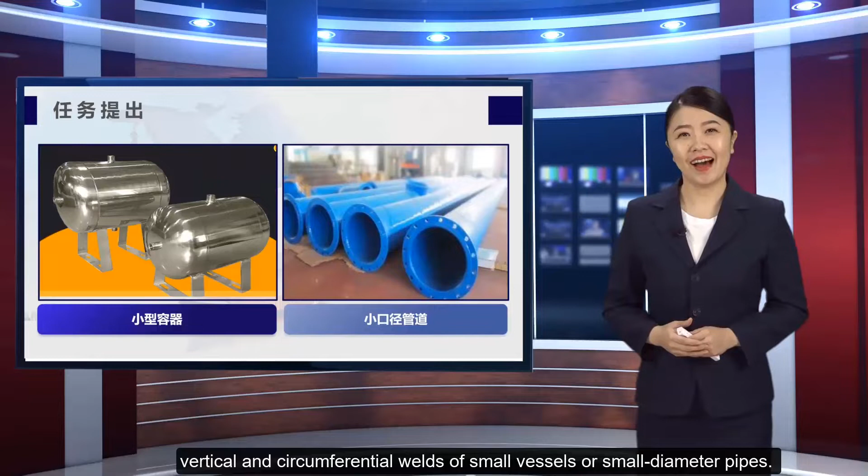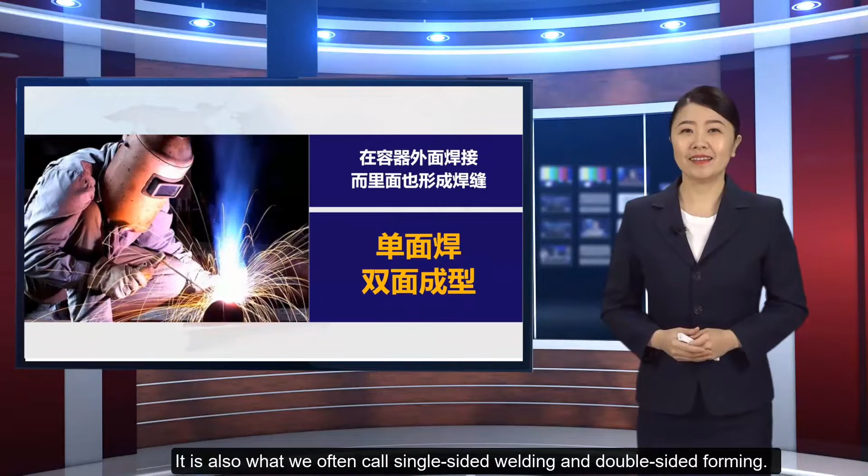In actual production, butt horizontal welding of electrode arc welding plates is mostly used for the welding of horizontal, vertical and circumferential welds of small vessels or small diameter pipes. This welding method can weld outside the vessel and form welds inside. It is also what we often call single-sided welding and double-sided forming.

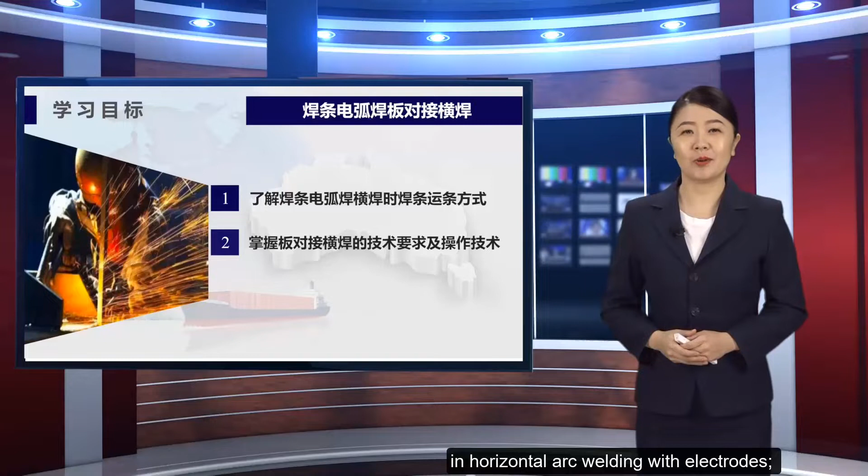In this class, we will explain the basic operation skills of butt horizontal welding of electrode arc welding plates. Learning objectives: 1. Understand the electrode transport method in horizontal arc welding with electrodes. 2. Master the technical requirements and operation techniques of butt horizontal welding of plates. 3. Select welding parameters.

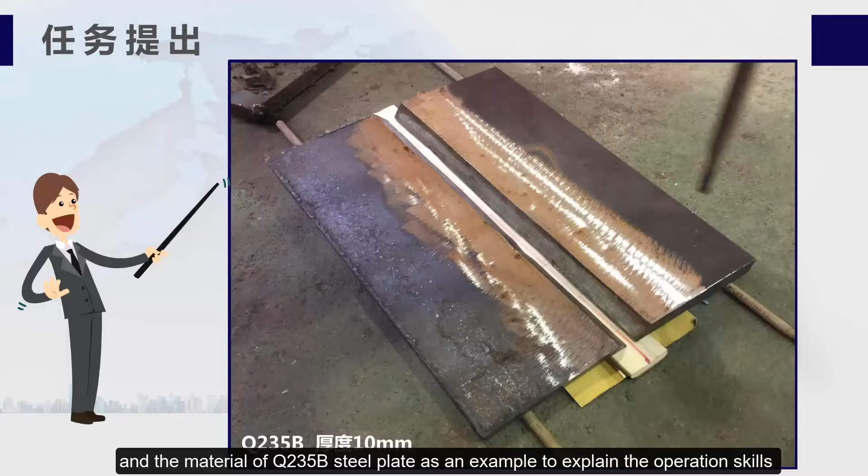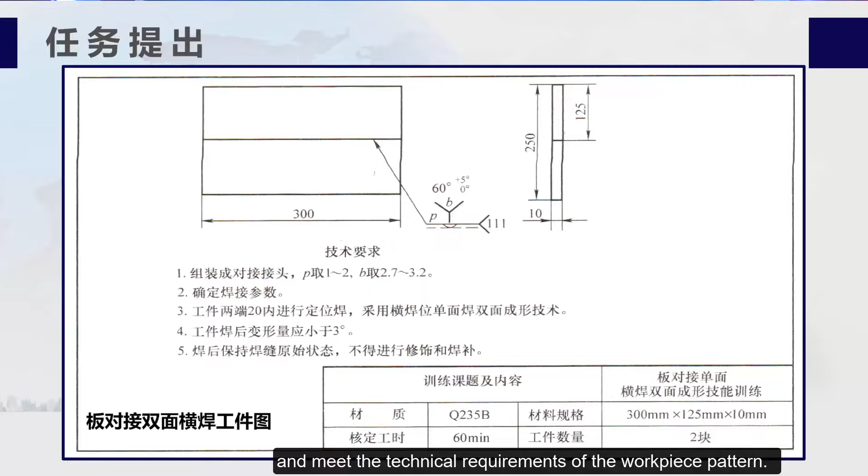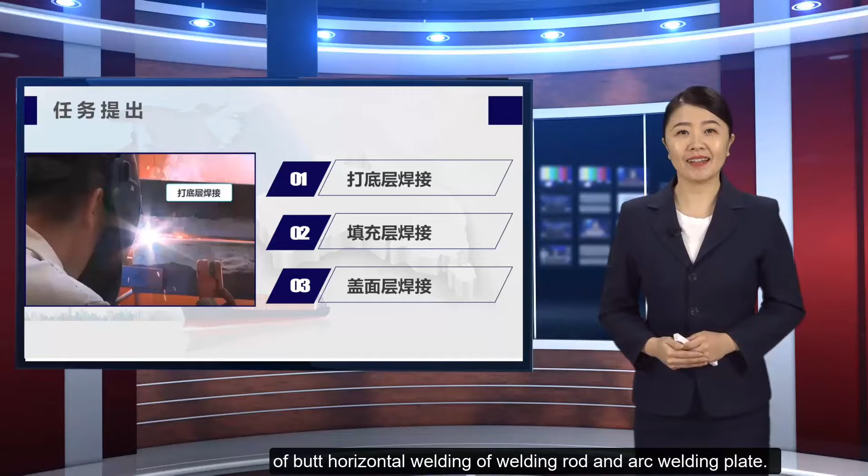Next, we take a 10 mm thick Q235B steel plate as an example to explain the operation skills of butt horizontal welding of electrode arc welding plates. The students read the workpiece pattern, complete the welding piece production task, and meet the technical requirements of the workpiece pattern. The welding operation is divided into 3 layers: the bottom layer, the filling layer and the cover layer. Let's follow my video below to understand the operation.

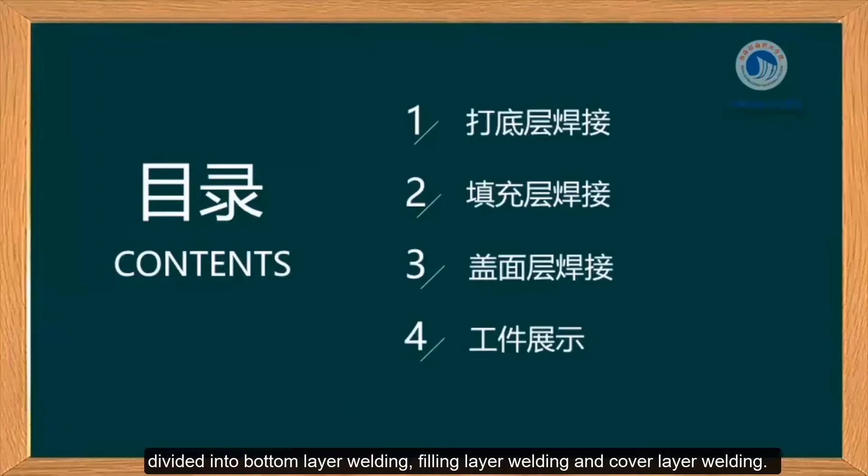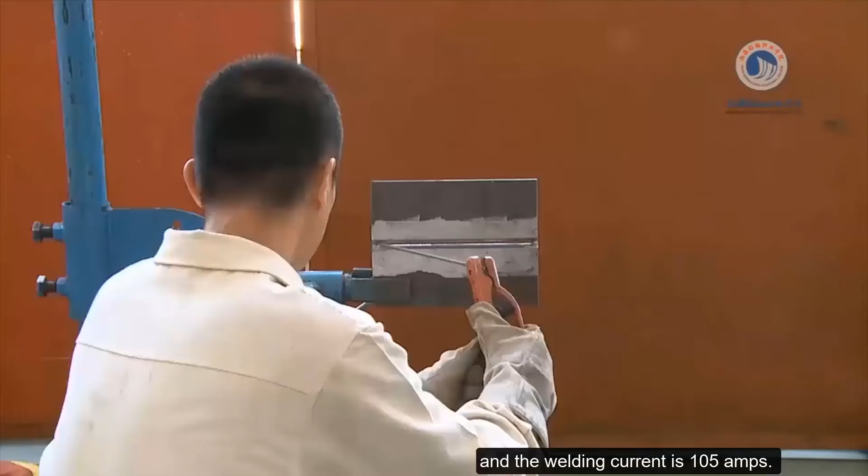Electrode arc welding plate butt horizontal welding can be divided into bottom layer welding, filling layer welding and cover layer welding. The bottom layer: the diameter of the electrode is 3.2 mm, and the welding current is 105 amps. Fix the assembled test plate vertically on the fixture according to the horizontal welding position. When the bottom layer is welded, the right welding method is used with arc breaking welding.

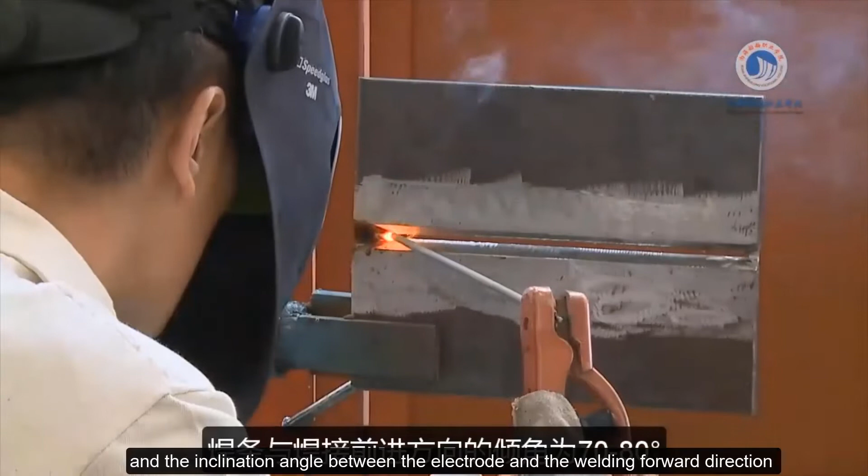During the welding process, the angle between the electrode and the weldment is 80 to 90 degrees, and the inclination angle between the electrode and the welding forward direction is 70 to 80 degrees. When welding the bottom layer, start the arc in the groove 10 to 15 mm before the starting welding end, and then pull the arc back to the tack weld for welding.

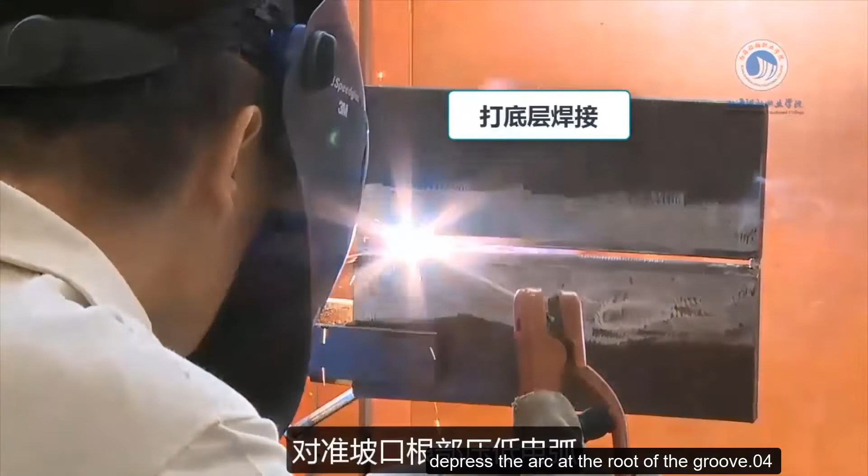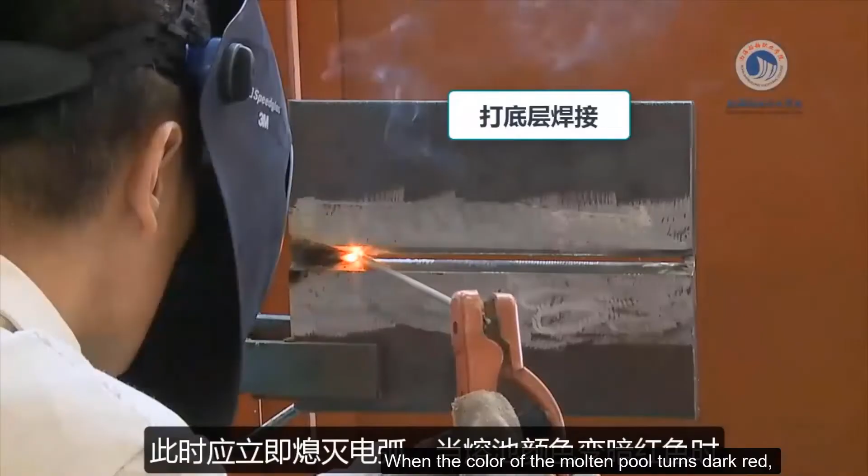When the welding arc reaches the end of the tack weld, press the arc at the root of the groove. When a pop sound is heard, it means that the weld pool has been formed, and the arc should be extinguished immediately. When the color of the molten pool turns dark red, the arc should be reignited immediately above the molten pool for welding. Repeat the above method until the bottom welding is completed.

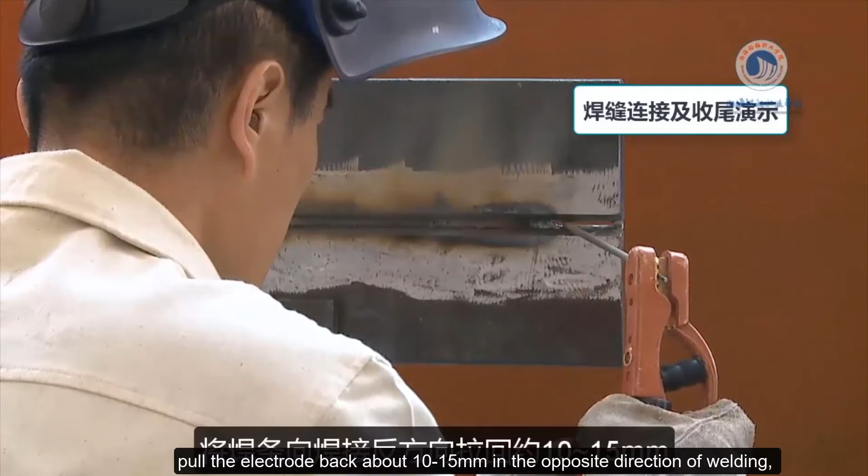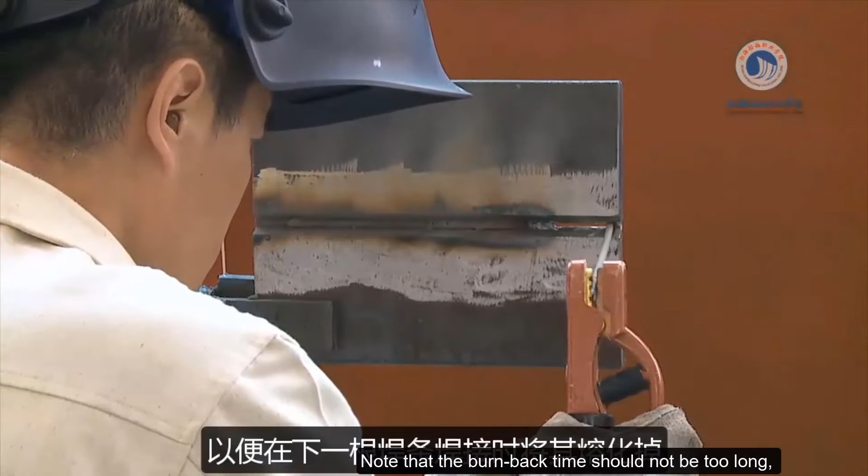When the electrode needs to be replaced, pull the electrode back about 10 to 15 mm in the opposite direction of welding, and lift the electrode quickly, so that the arc is gradually elongated and extinguished quickly. This brings the shrinkage hole to the surface of the weld so that it can be melted away when the next electrode is welded. Note that the burn-back time should not be too long, so that the joint becomes a slope. The arc for the joint should be started 15 mm in front of the crater or weld pool.

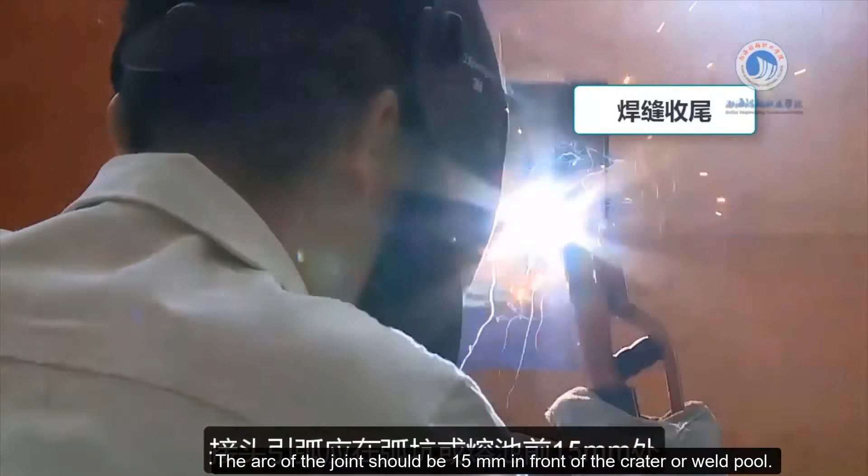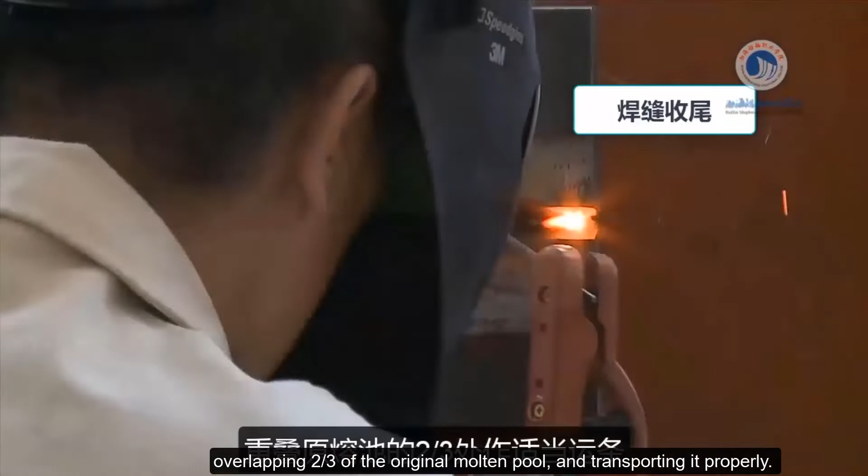After the arc is ignited, it is properly elongated, and it is quickly led to the joint arc crater along the seam, overlapping 2/3 of the original molten pool, and transported properly. When the front and rear molten pools are in good agreement and meet the requirements of the weld size, welding proceeds in the welding direction.

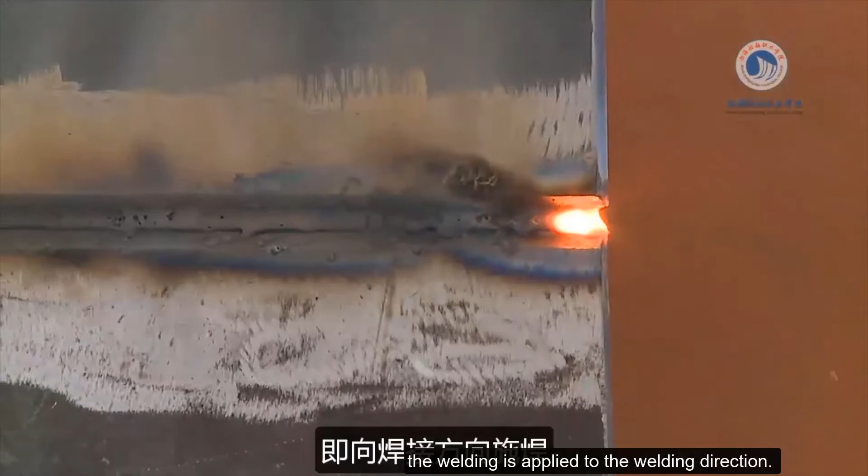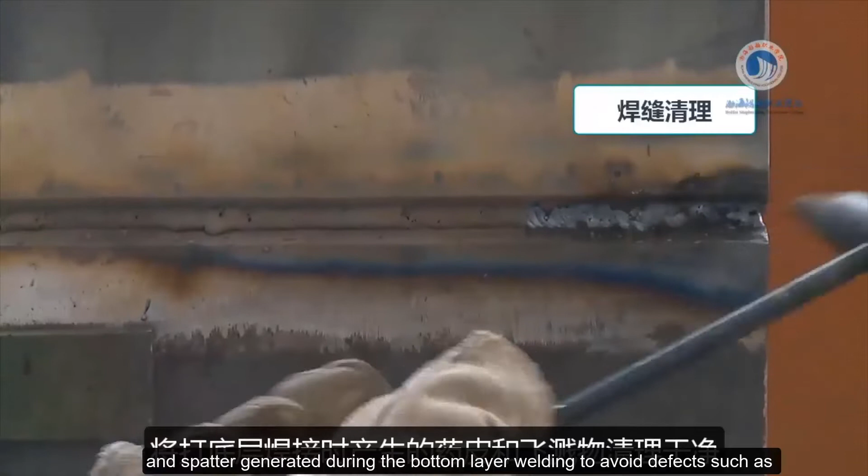After the bottom layer welding is completed, use tools such as a hammer or steel chisel to clean up the coating and spatter generated during the bottom layer welding to avoid defects such as slag inclusion in the next layer of welding.

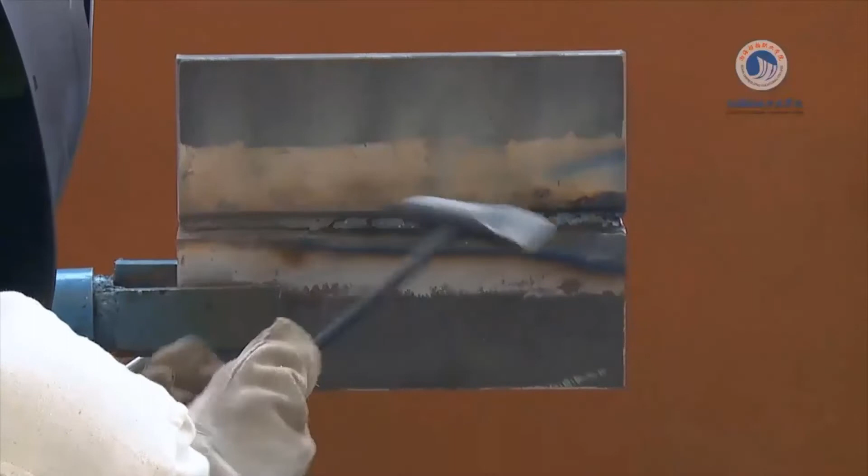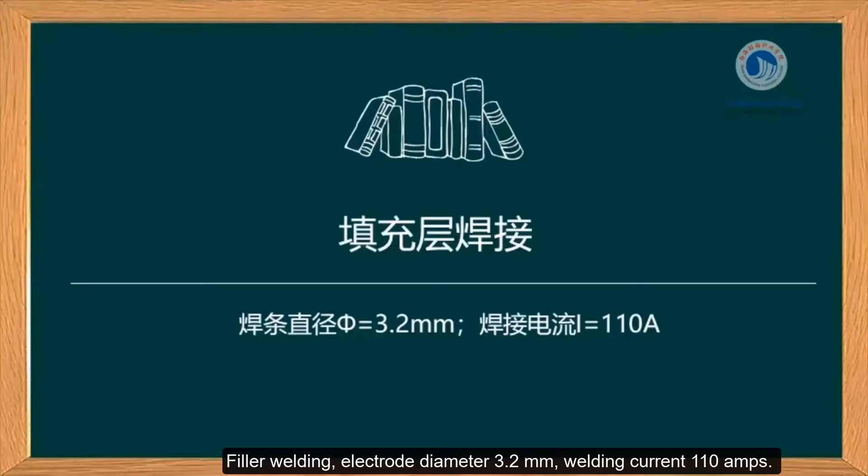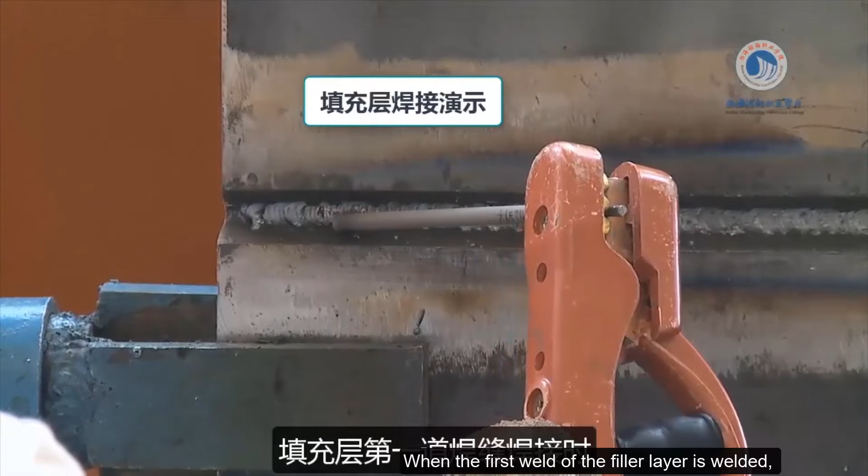Filler welding: electrode diameter 3.2 mm, welding current 110 amps. The filling layer adopts the continuous arc welding method for straight arc welding, and adopts multi-pass welding from bottom to top. When the first weld of the filler layer is welded, the angle between the electrode and the weldment is 95 to 100 degrees.

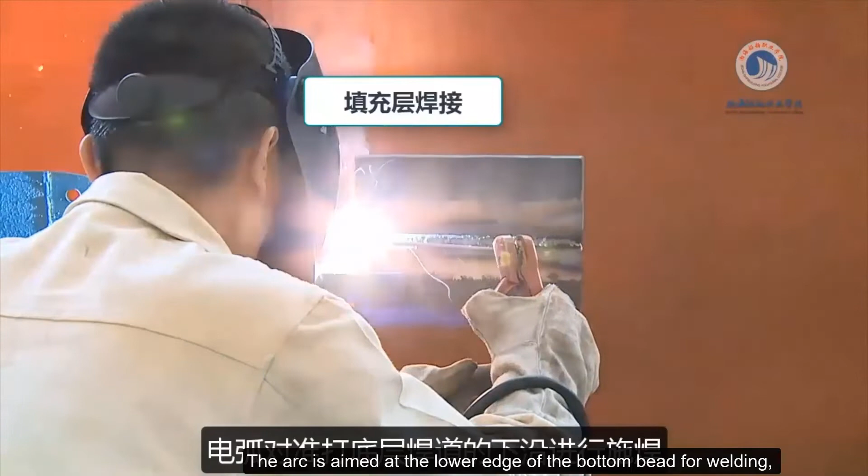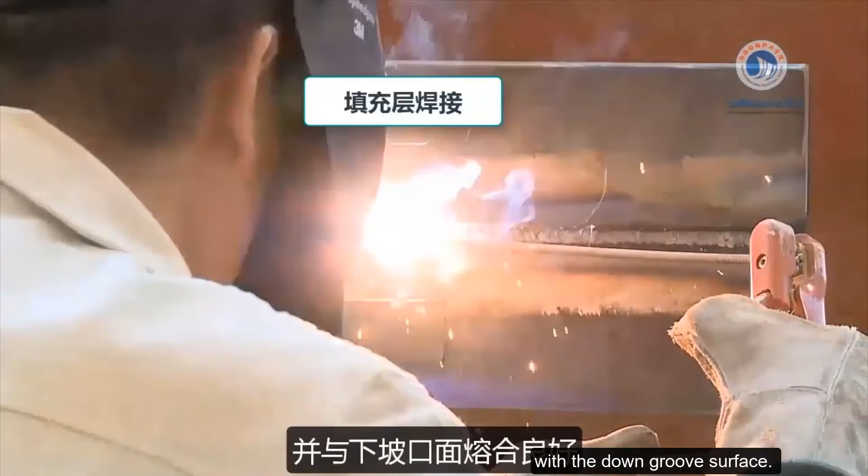Start the arc in the groove 10 to 15 millimeters in front of the starting welding end, and then pull the arc back to the starting welding end for welding. The arc is aimed at the lower edge of the bottom bead, so that the molten pool covers 1/2 to 2/3 of the bottom bead surface and fuses well with the lower groove surface. Fill the crater with arc welding when finishing.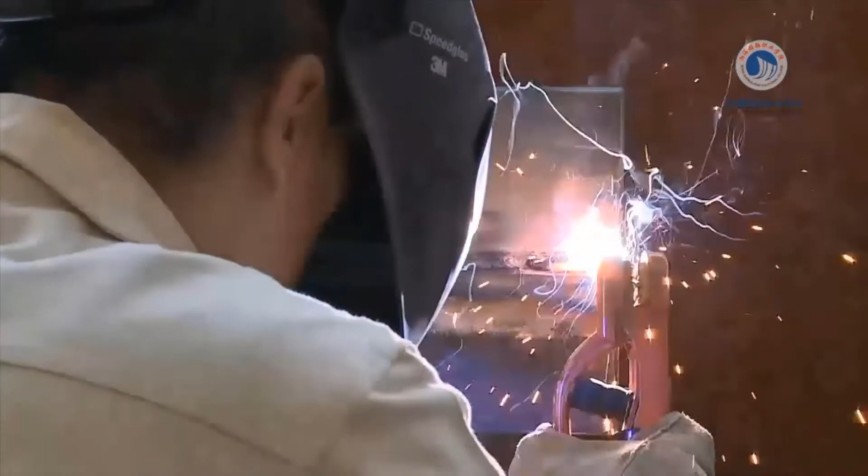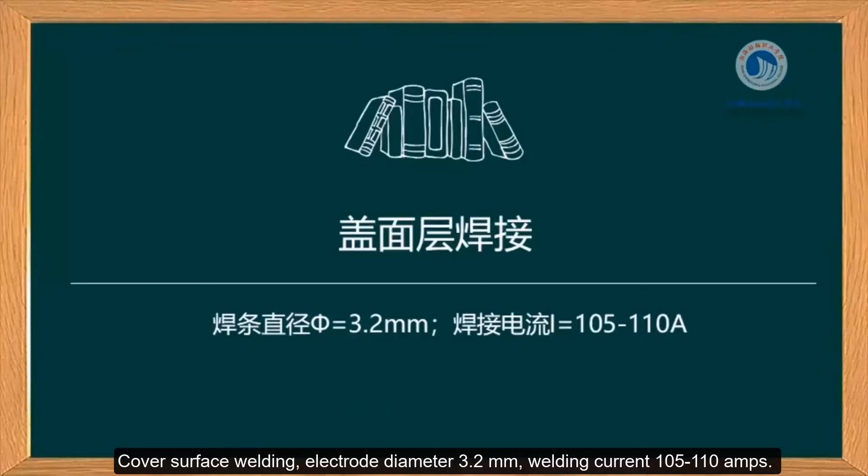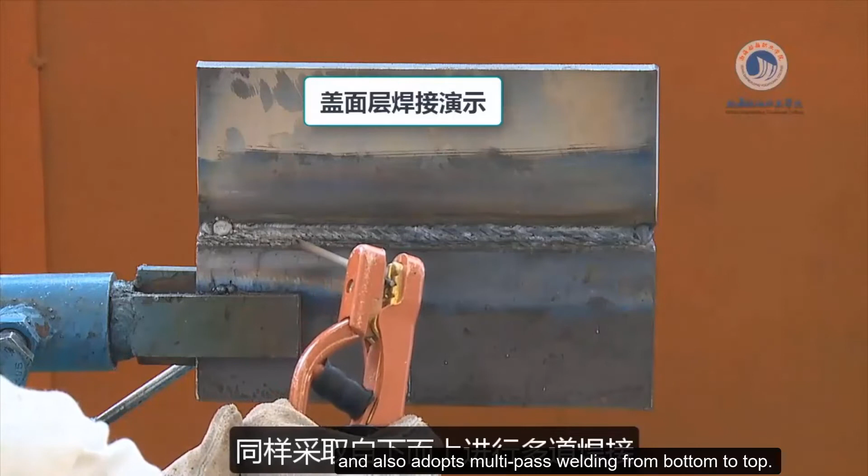Cover surface welding: electrode diameter 3.2 millimeters, welding current 105 to 110 amps. The cover layer welding adopts the continuous arc welding method to perform straight arc welding, and also adopts multi-pass welding from bottom to top. Each weld starts the arc on the filler layer 10 to 15 millimeters before the start of the weld, and then pulls the arc back to the start of the weld for welding.

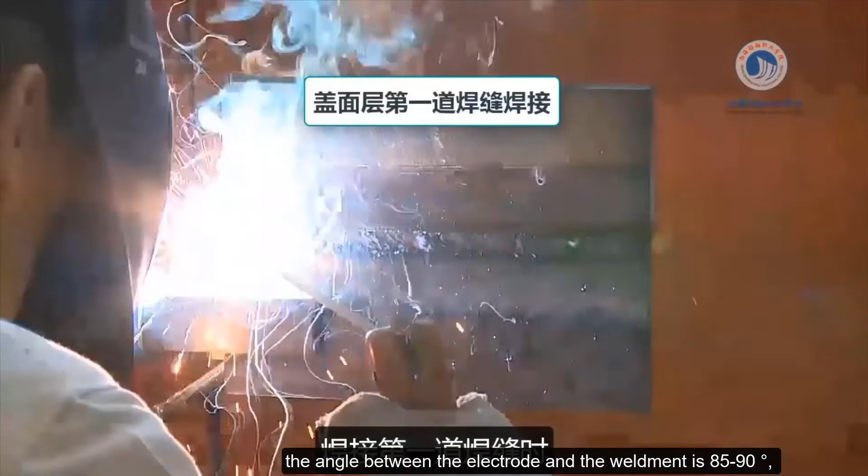When welding the first weld, the angle between the electrode and the weldment is 85 to 90 degrees. The welding speed should be uniform, and the molten pool and the edge of the groove are well fused. Control the welding speed to prevent the weld bead from sagging.

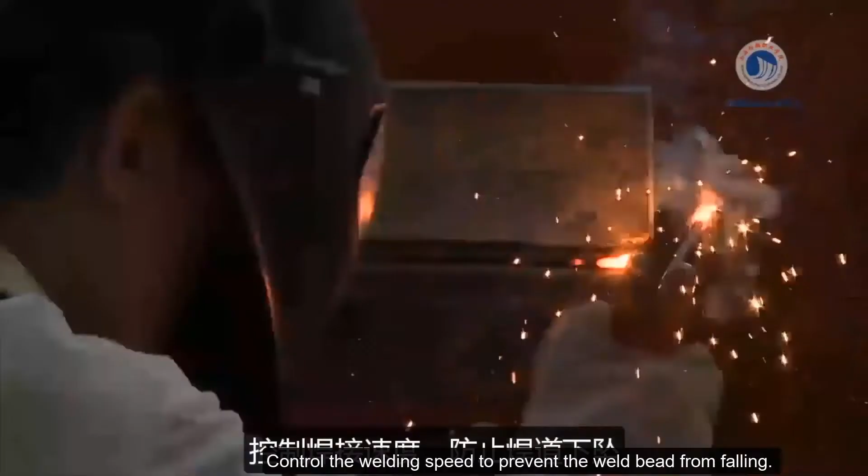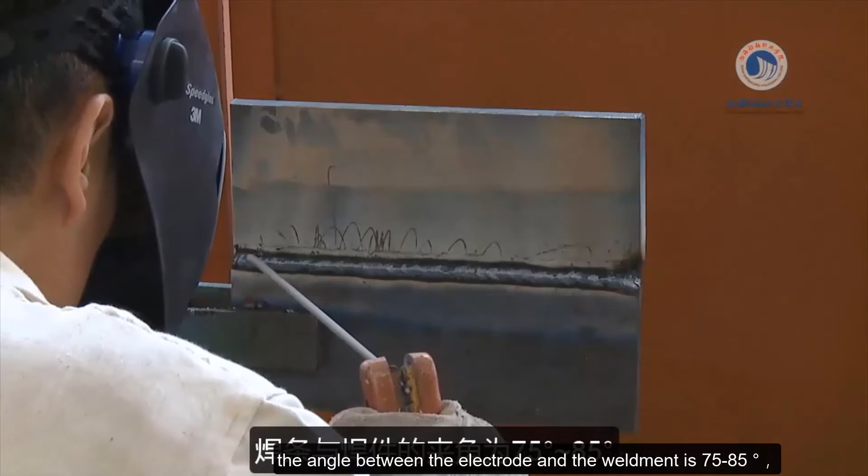When welding the other cover welds except the first and last, the angle between the electrode and the weldment is 75 to 85 degrees, and the position of the welding arc is controlled so that the lower edge of each cover weld covers 1/2 of the previous cap weld. The transition between weld beads is smooth and neat.

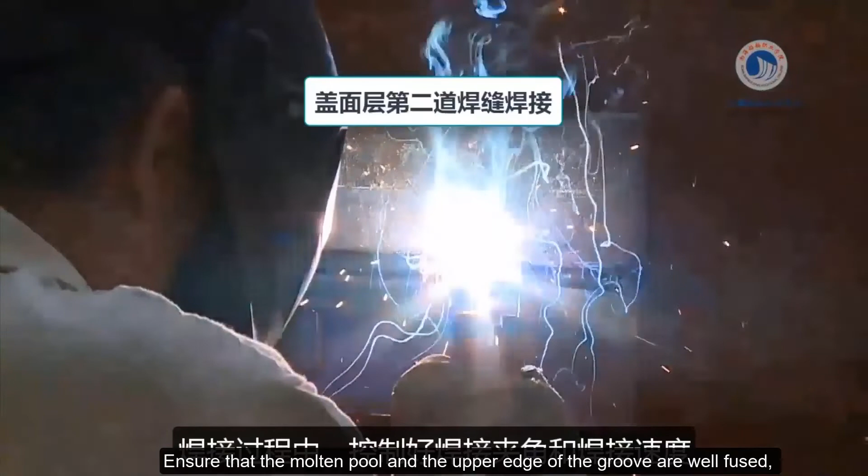When the last cover weld is welded, the angle between the electrode and the weldment is 70 to 75 degrees. Appropriately reduce the welding current or increase the welding speed. Control the welding angle and welding speed during the process. Ensure that the molten pool and the upper edge of the groove are well fused, and prevent the molten pool from flowing down under gravity, resulting in undercut defects due to poor fusion with the upper edge of the groove.

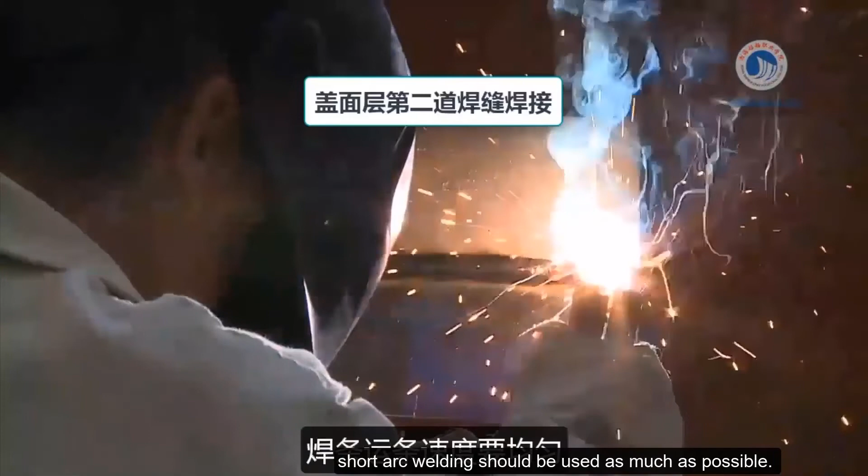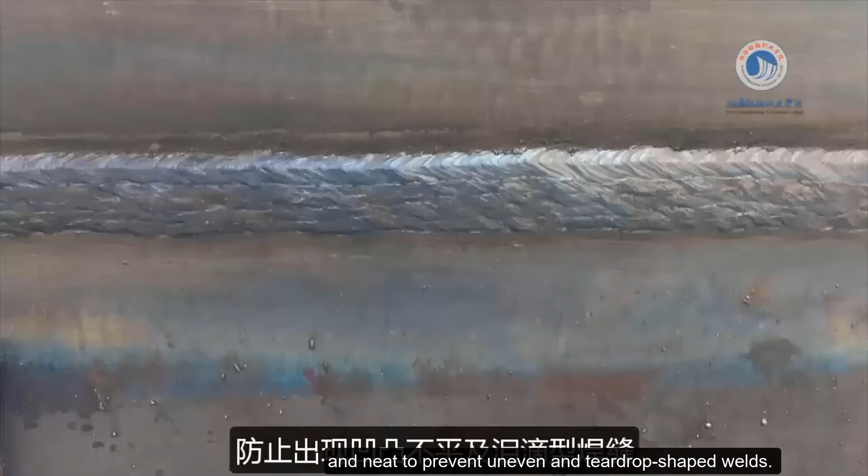In the process of cover welding, short arc welding should be used as much as possible. The speed of the electrode should be uniform, and the overlapping position of each weld should be smooth and neat to prevent uneven and teardrop-shaped welds. The arc crater is filled at the end of each weld.

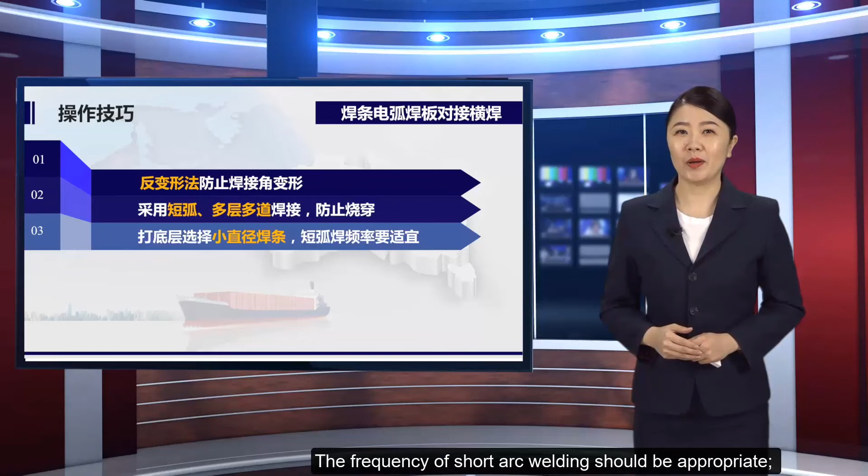Through the operation video just now, we need to master the following operating skills. 1. Use the anti-deformation method to prevent angular deformation before welding. 2. Use short arc, multi-layer and multi-pass welding to prevent burn-through. 3. Choose a small diameter electrode for the bottom layer. The frequency of short arc welding should be appropriate. 4. The arc should stay at the root of the groove properly to prevent undercut.

Finally, according to the different positions of the weld bead, adjust the appropriate electrode angle to prevent undercut on the upper side of the steel plate and sagging on the lower side.